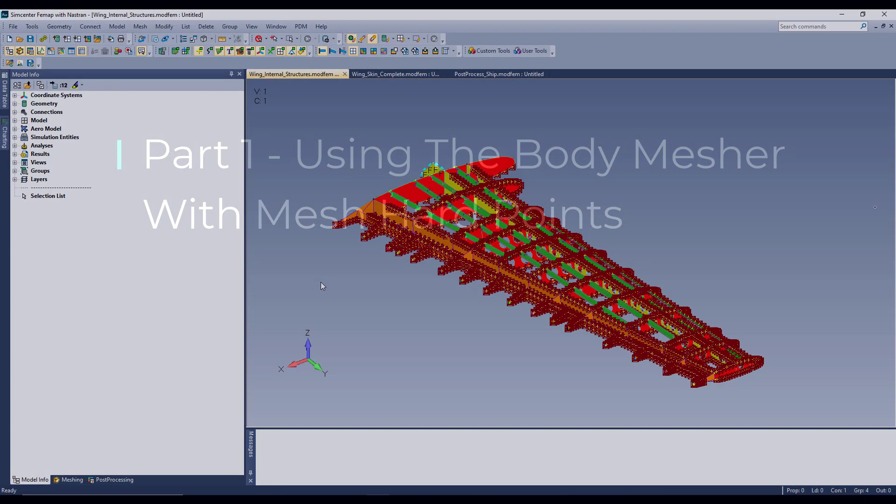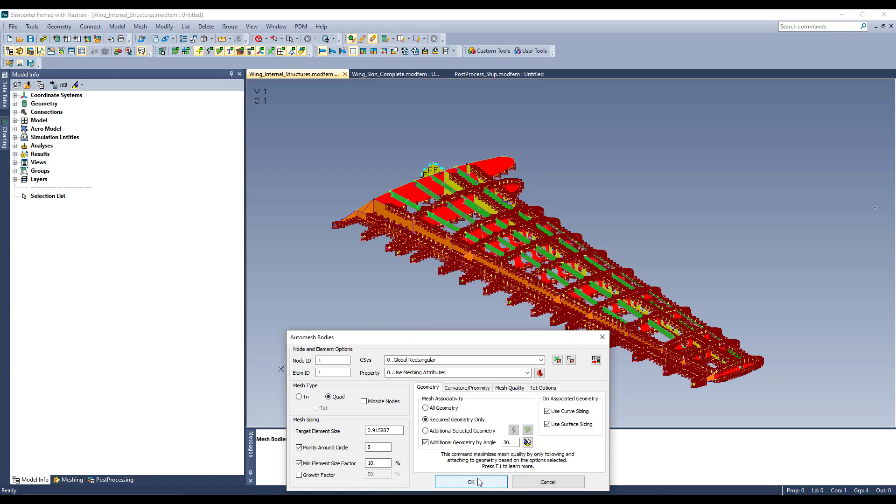In the first part of the meshing enhancements for Simcenter Femap version 2301, we're going to look at how we can use the mesh bodies with mesh hardpoints. In versions previous to 2301, if we use the mesh bodies, you'll notice that it will skip the hardpoints on meshing.

Now that the surfaces have been meshed with the previous command, you're going to notice some messages in the message window that say unable to insert all hardpoints. And this is what happens when you use the mesh bodies with mesh hardpoints.

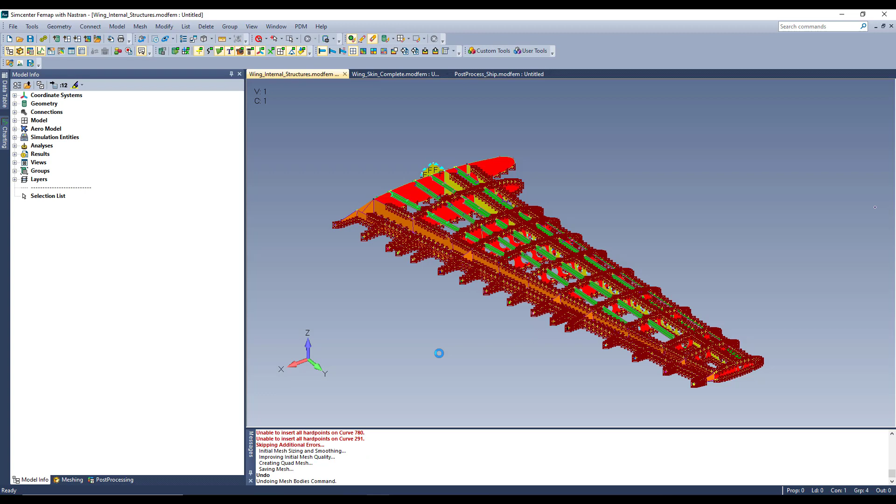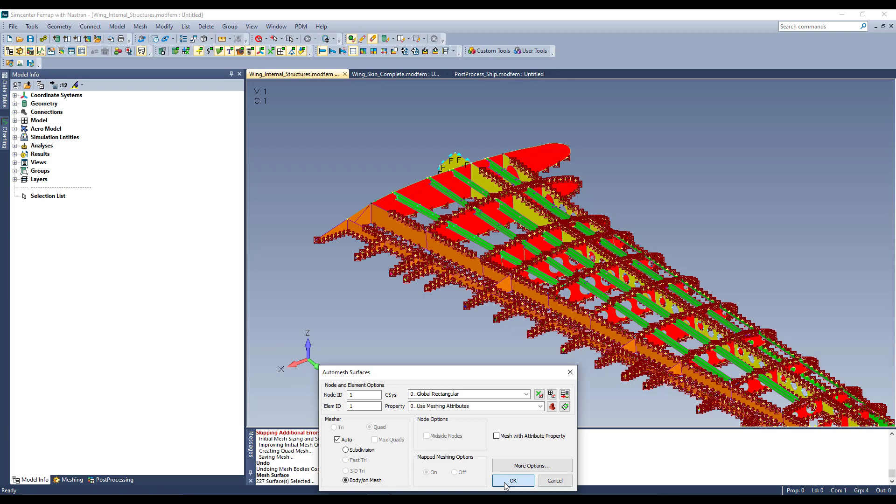Now, if we just undo this, we can now utilize the mesh bodies with the hardpoints. Simply come up to Mesh, Geometry, and Surface, and then select your surfaces. Here you'll see a new option for body on mesh. Now when you mesh those surfaces, the mesh will line up with those hardpoints.

In the second part of the meshing enhancements for Simcenter Femap version 2301, we're going to look at how we can use the mesh on mesh to edit a mesh with beam elements. And this edit will refine and unrefine the mesh with whatever size you want.

So here we currently have a mesh with no geometry, and we need to edit this mesh, and it has beam elements. So what I'm going to do first is go to the mesh on mesh, which allows us to edit a mesh with no underlying geometry.

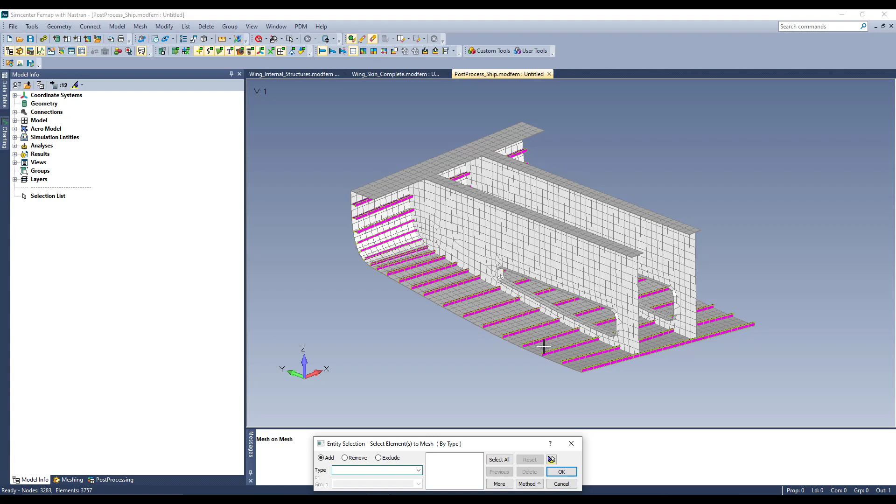So first I'm going to select the type I want to edit. And in this case I want to edit the plate elements. And with editing the plate elements, the beam elements will update as well.

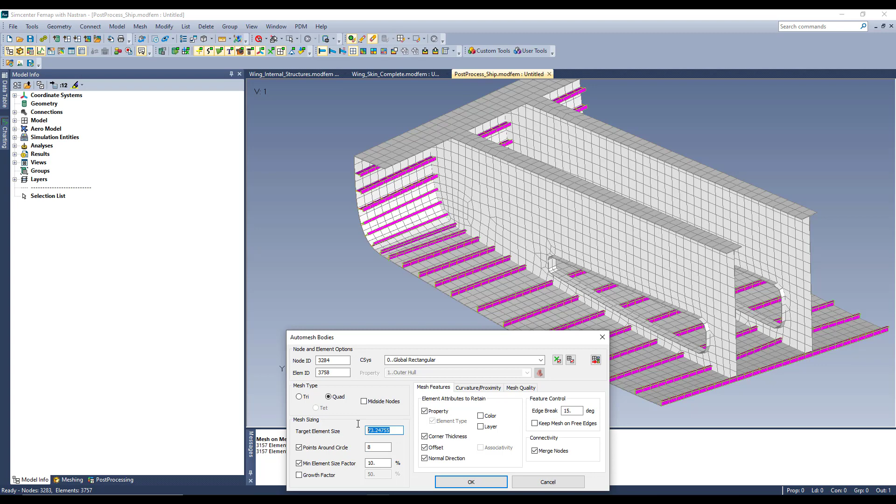So in this case, I will refine the mesh. And notice, as I refine the mesh, the beam elements update with the corresponding plate mesh as well.